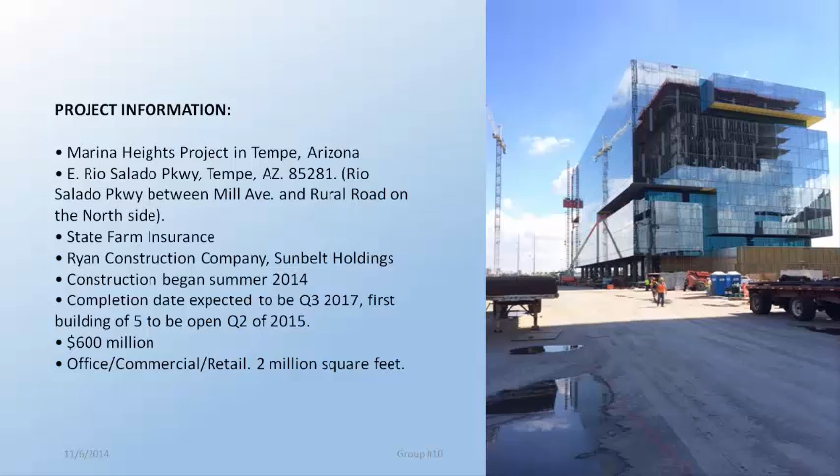The first of 5 buildings will be open the second quarter of 2015. This is a $600 million project that occupies about 2 million square feet of office, commercial, and retail. So on our site visits, we observed ironworking, framing, grading, concrete, masonry, and painting. We observed a little over 1,000 work units, and roughly 30% of which, averaged out, was represented by direct work.

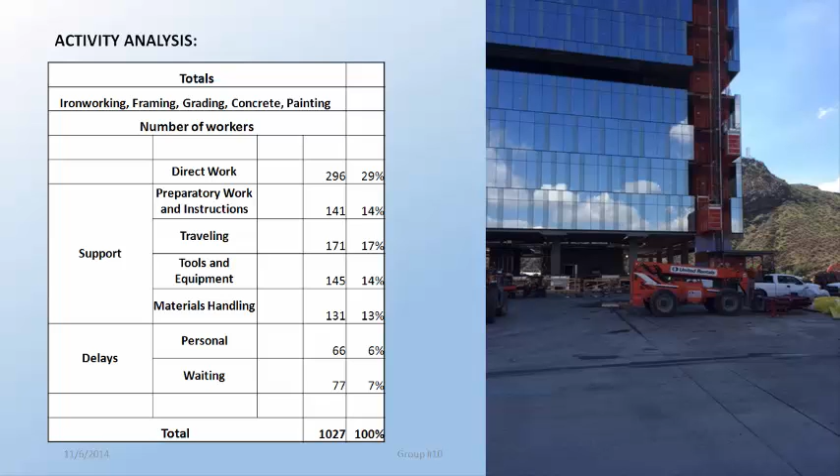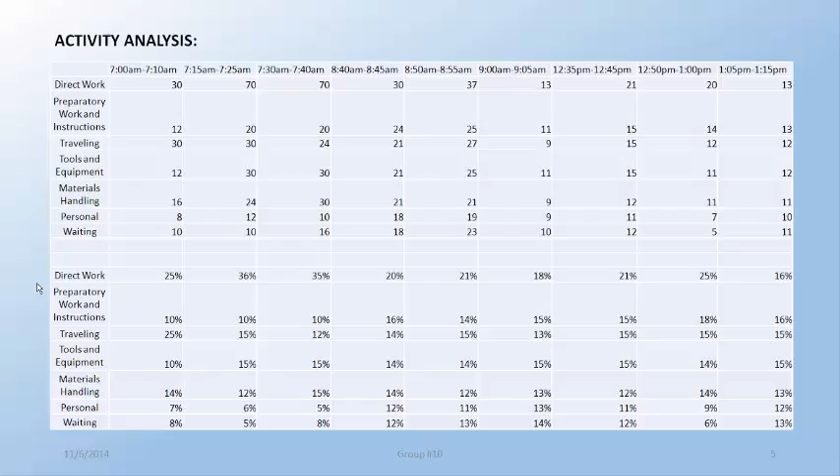So if we look across the timeline here from our times of visits, we did from 7 a.m. to roughly 1 p.m. on several different days. And again, if you look across the board, it's fairly consistent that direct work represents roughly 30% of all observations. The highest level of productivity was achieved in mid-morning, an hour or so after the shift began. Most of the workers seem to start their day at 6 and finish up about 2. There was a decline that was predictable around the lunch break hour, and also toward the end of their shift as well.

So on our observations, roughly 300 were direct work out of roughly 1,000. Another 450, 500 were represented by support work, with the remaining small percentage being delays, personal or otherwise.

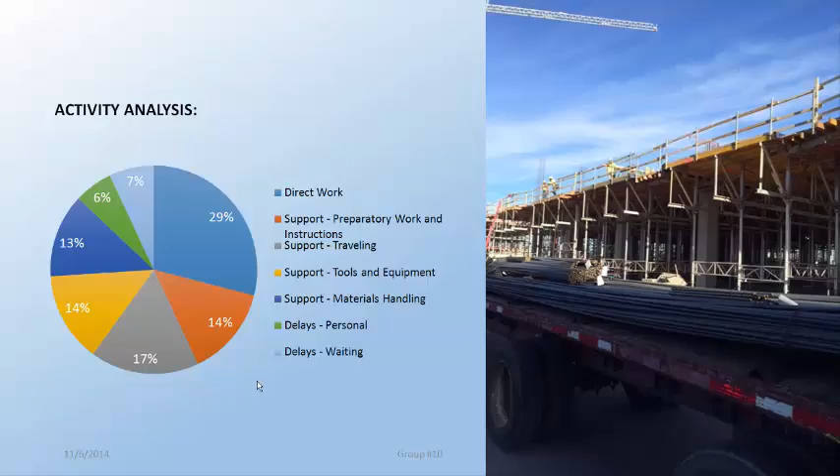So for our crew balance, we decided to observe a 6-man team. 3 of them were on a floor table, which happened to be the 4th floor of this building being constructed. They were pouring columns inside these forms around the rebar, and there was 1 concrete truck operator, a crane operator, and then a spotter on the ground as well.

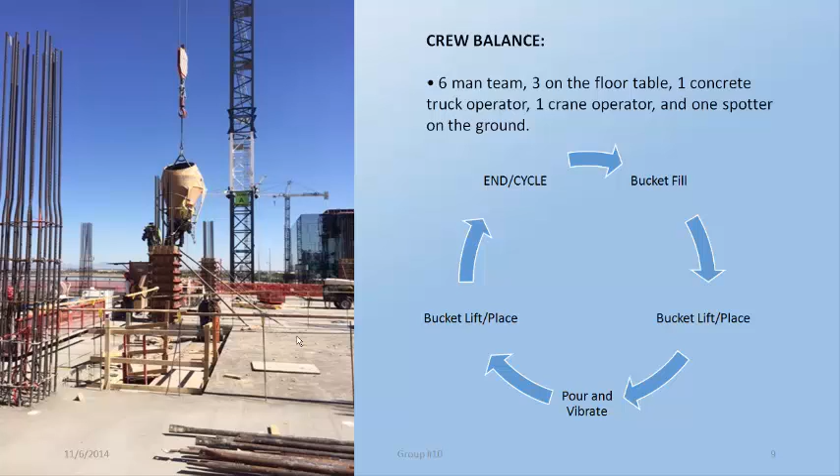So the dashed lines here represent the table floor as well as the columns being poured. There were, again, 3 workers on the table floor pouring columns, 1 concrete truck operator, a spotter, and a crane operator as well, and a large T crane. So the biggest observation that we had was that the workers all seemed to be disconnected and really just relied on 2-way radios to communicate with each other.

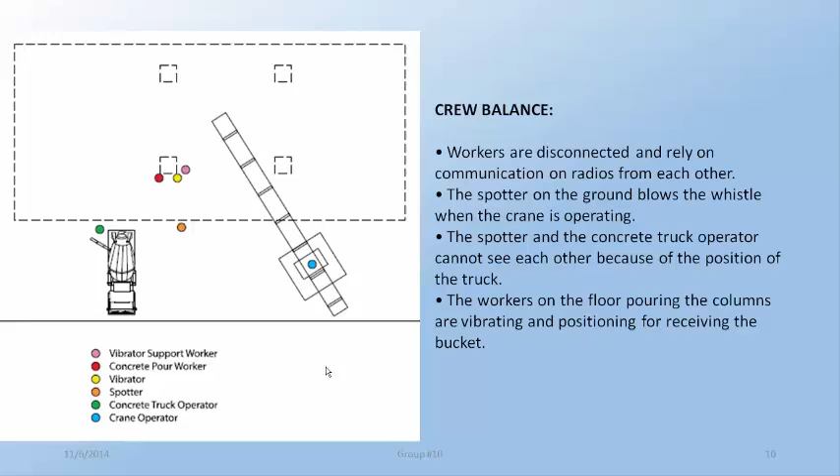The spotter on the ground, his sole task was to blow a whistle when the crane was overhead. And the spotter and the concrete truck operator can't see each other because of the position of the truck. The workers on the floor table pouring the columns are vibrating and positioning for receiving the bucket. So our cycle was about 15 minutes. The most unproductive worker, the one probably most easily replaced, would be the spotter on the ground. He really only added 5 effective units. Our total units observed was 90, 34 effective, for an effectiveness of 38%.

The concrete truck operator actually had less effective units, but his job is more skilled than the spotter, because you do have to be able to estimate how much material is in the bucket as well as in the chute, so that you're not wasting material or dumping it on the ground.

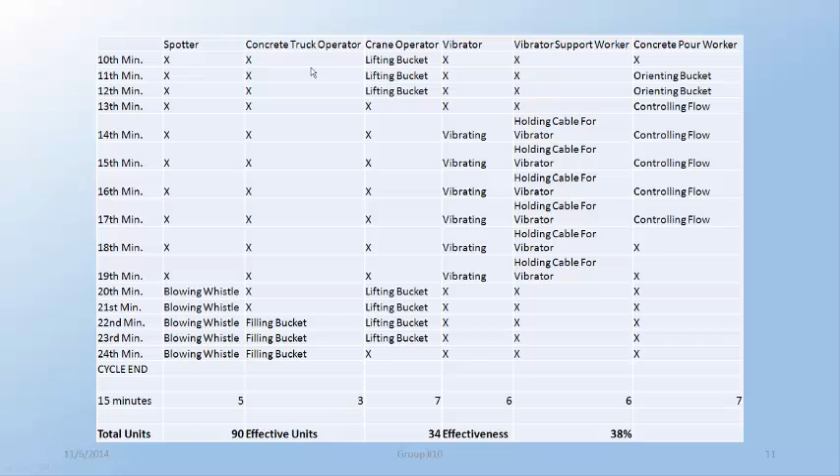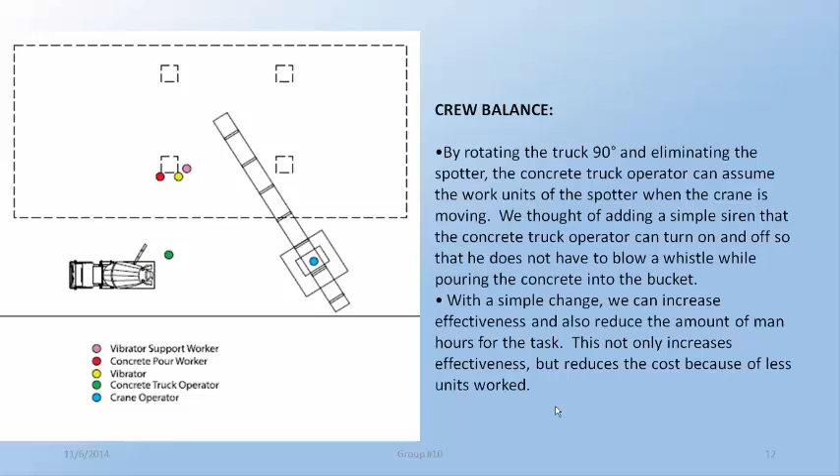So our proposal was to eliminate the spotter and rotate the concrete truck 90 degrees so that the concrete truck operator assumed the responsibility of the spotter, which was to blow a whistle or signal when the crane was overhead. We thought of adding a simple, low-tech, audible siren that the concrete truck operator can turn on and off so that they don't have to blow a whistle while pouring concrete into a bucket. With a simple change like that, we could increase effectiveness and also reduce the amount of man hours or work units total. So it not only increases effectiveness but also reduces cost because of less units worked.

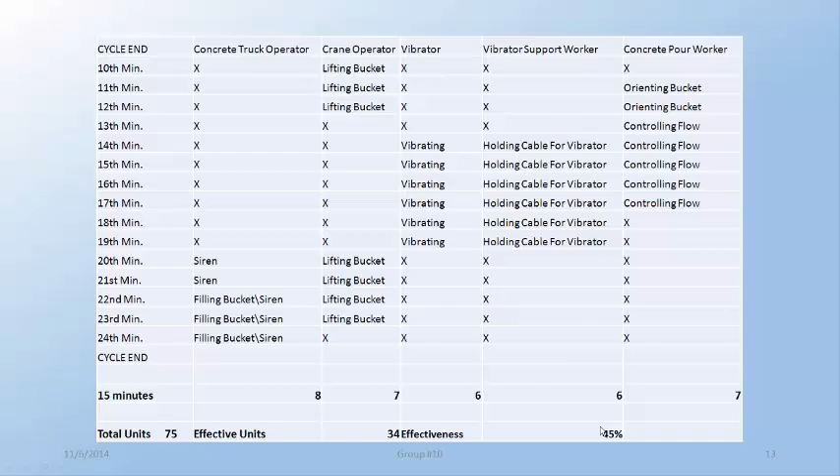Finally, we'll discuss the safety. The culture of Ryan Construction is that they're very proactive with safety. They have all of their expectations for dress and safety equipment clearly posted in the office. PPE is definitely strictly enforced. All workers must wear closed-toed shoes, safety glasses, hard hats, and bright vests at all times. Sunglasses do not count as safety glasses. They said you can use tinted safety glasses, but not sunglasses.

A little bit more about their culture. In one of their daily meetings every week, they have what they call a toolbox talk, which is to discuss current safety issues and improvements. They also have a yearly safety award banquet for their safest subcontractors, which is actually nice because it does motivate the subcontractors to adhere to their programs and operate safely as well.

While on site, we never felt unsafe and did observe redundancies in safety, such as designated areas for walking, several spotters and people blowing whistles while heavy equipment was moving, and in general it seemed to foster a safe environment.